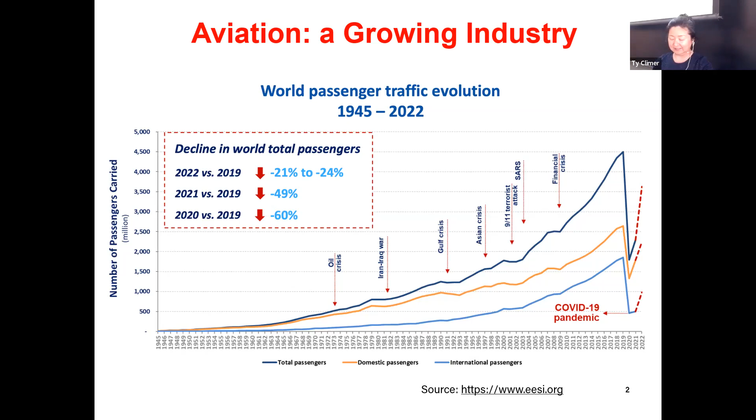Now next, I want to talk about exactly what the emissions from aviation are. Currently we talk a lot about carbon dioxide because that's the global warming, the climate crisis we're dealing with. But carbon dioxide is not the only one. There are also nitrous gases, water vapor, and soot, sulfate, particulates. So these are all kinds of emissions from the exhaust of aircraft engines.

Now, this is a study really focused on the effect of these chemical species on climate. They can either warm or cool the climate, either directly or indirectly. So the bottom bar, this colorful bar, basically tells us each of these species' contribution to global warming relative to CO2. CO2 is 1, because that's the reference.

Nitrous gases and also ozone—and methane actually is blue, that means methane cools the atmosphere. Sulfate also cools. So this is to give you an idea that carbon dioxide is not the only pollutant. There are others—for example, nitrous gases, NOx, ozone—those are the things really important that we have to deal with.

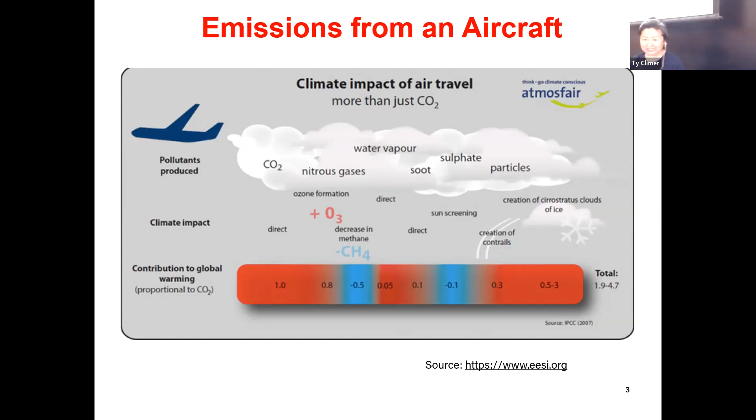Now next, I want to show you global CO2 emissions from aviation. Again, this is consistent with the number of passengers aircraft carry that I showed you in the very beginning—it's going up. The red line is the total CO2 emission in 2018, which is about 1 billion tons. Now, aviation is about 3% of the total carbon dioxide emission. Again, it's going to be increasing, maybe to 5% in 10 years and even more.

So this is something that we cannot ignore. We have to address that if we want to achieve a net zero carbon future.

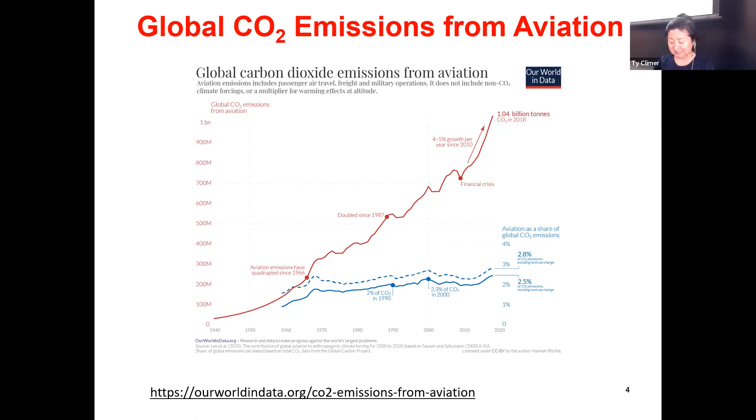All right, next let's start our journey to sustainable aviation. I'm going to share with you my understanding of the technologies in the future and what needs to be done to achieve sustainable aviation.

Now, the first question is, aviation perhaps is the hardest transport sector to decarbonize, right? I read a report by the National Academy of Engineering. Basically, what it says is, in order to achieve zero carbon emissions by 2050, nearly everything needs to be electrified, and the electricity comes from alternative renewable sources like solar, tidal, right? Everything needs to be electrified. I think that's fine, right?

Think about the devices or anything you use in life. What cannot be electrified? I'm still using a natural gas heater and natural gas stove in my home, but come on, they can be replaced by electricity. So basically everything can be electrified, but there are two industries going to be very hard to electrify. The first one is aviation, which we're going to discuss today, especially for long-range intercontinental airplanes. Now, the other one perhaps is ocean shipping.

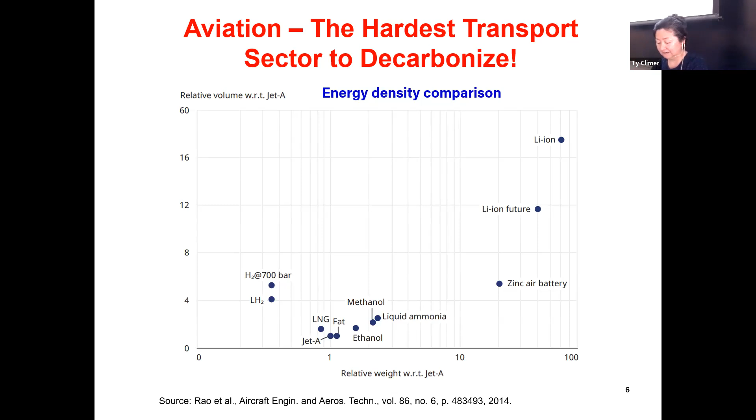All right, so aviation — that's a challenge. We always say, when we don't say difficulties, we always say challenges, because challenges indicate opportunities. So I'm going to talk about the research and development opportunities in the aviation industry to achieve zero emission in the future.

This slide gives an idea about the decarbonization pathway in the past and also current efforts. Our aero students are probably familiar with these concepts. Really the industry is focusing on improved efficiency, right? If I can improve the engine efficiency by 10%, that means I'm going to burn 10% less Jet A. I'm going to emit 10% less carbon dioxide, right? I listed a couple of the technologies or approaches.

They're not a complete list, but just to give you some flavor about what the aviation, the aerospace industry is doing nowadays. For example, increased bypass ratio turbofan, right? Those who have taken 438 air-breathing propulsion know the importance of bypass ratio on the overall efficiency. So that's the trend: higher bypass ratio, higher cycle efficiency, and lower fuel consumption.

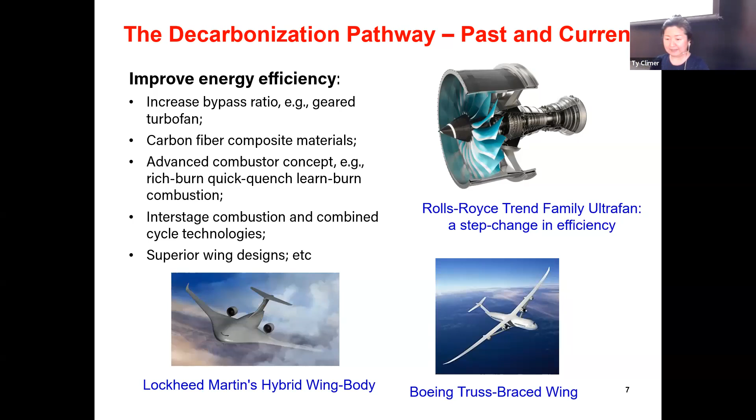But keep in mind, if these aircraft engines still burn Jet A, no matter how much efficiency you can improve - 10, 20%, that would be a breakthrough - this is not enough, okay? So what is the future? If we really truly want to achieve net zero emissions by 2050 or 2100...

This is the path, what I'm showing you here. This is from IEEE Electrification Magazine. I want to mention that there are mixed views about the future - if you look at leading experts, even they disagree with each other.

I think this is a complex situation. It depends - maybe each country will have a different approach, depending on what kind of natural resources the country has, the geopolitical considerations, a lot of factors. But me personally, I believe this is the future.

Okay, if you look at this graph, before the 1940s, think about the airplanes before World War I and II - those propeller airplanes driven by an internal combustion engine burning gasoline. So this is gasoline - those are early aircraft engines. They were slow, but they were significant in terms of their importance to the aviation industry's progress.

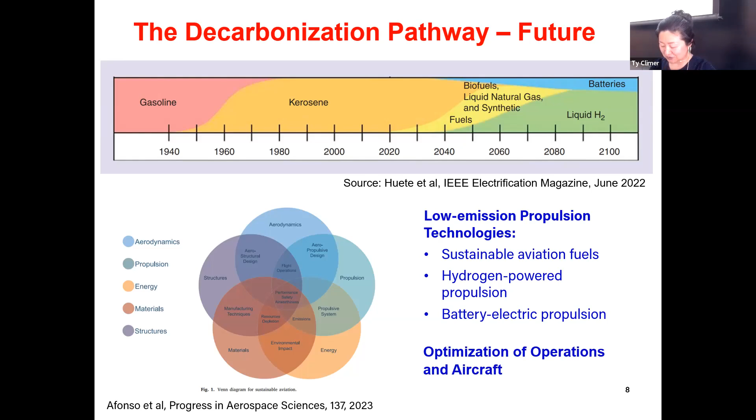Now, the first one we're going to look at is sustainable aviation fuel. So what is sustainable aviation fuel? These are liquid hydrocarbon fuels similar to Jet A, but not exactly the same. We know Jet A is a mixture of about 300 different species, so it's not a pure chemical species, it's mixed.

Sustainable aviation fuels are derived from a variety of feedstocks, including agriculture and forest waste, municipal solid waste, or even non-food crops. We use thermal and chemical methods to convert them to liquid fuels. But again, they are liquid hydrocarbon fuels, and because the properties are similar to Jet A, there's no need to change the infrastructure.

The fuel supply, the airport, and even the aircraft itself - that's a short path to solve the problem. In fact, it is the transition step. So I listed a couple of examples of production of sustainable aviation fuels. The first one is called gas, this is the gasification process, Fischer-Tropsch. The feedstocks are cellulosic biomass like wood, agricultural waste, even municipal solid waste. This liquid fuel can blend with Jet A by a maximum of 50%. This is gasification, a high pressurized heating process.

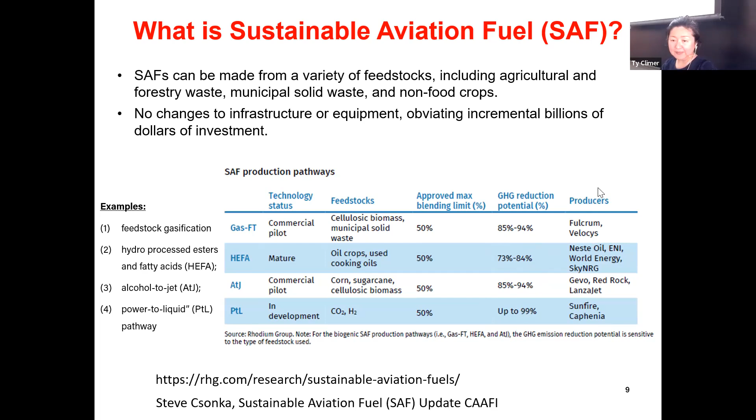To give you an idea, this is an example biorefinery to generate sustainable aviation fuels. Basically, we have two ways to do that. The first is the biochemical route, using microorganisms like bacteria or yeast to convert biomass into liquid fuel. The other is thermochemical, using heat - using a gasifier, for example, with heat and often pressurization, because pressurizing helps the conversion efficiency to convert biomass into a gas or later into liquid fuel.

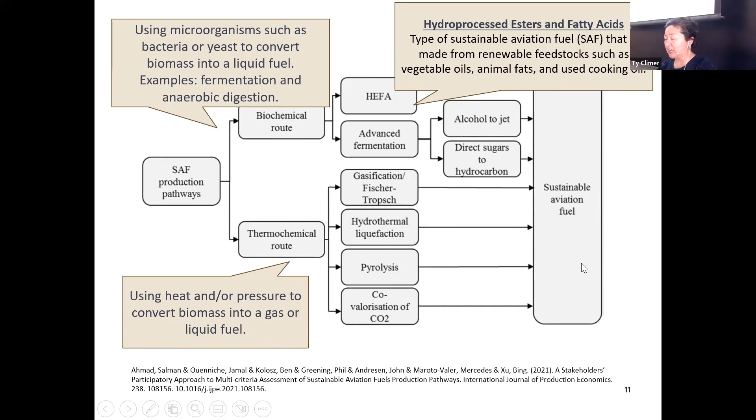I would talk about hydroprocessed esters and fatty acids. Again, they can be made from renewable feedstock: vegetable oils, animal fats, and even cooking oils. So these are the different processes to generate liquid sustainable aviation fuel.

So what are the challenges and opportunities with sustainable aviation fuel? On the bottom, you see the Biden administration's Sustainable Aviation Fuel Grand Challenge. The goal is to scale up production: 3 billion gallons of sustainable aviation fuel by 2030, and 35 billion by 2050. Currently it's 4.5 million gallons per year. So as I said, by 2050 this is a transition to the eventual zero carbon emission.

Sustainable aviation fuel plays a very important role. Now, what are the challenges? Feedstock availability and cost, and production capacity, infrastructure, refinery, storage tanks, transportation systems.

There are some pilot plants, smaller scale and on subsidized grants from government, but they're not scaling up yet. There's also regulatory and certification requirements.

In terms of compatibility with existing aircraft, whatever process generates a liquid hydrocarbon fuel, you cannot just throw that into an aircraft engine. It may cause problems with physical properties, chemical properties, like boiling point or viscosity. They need to fit into the current range that works for an aircraft.

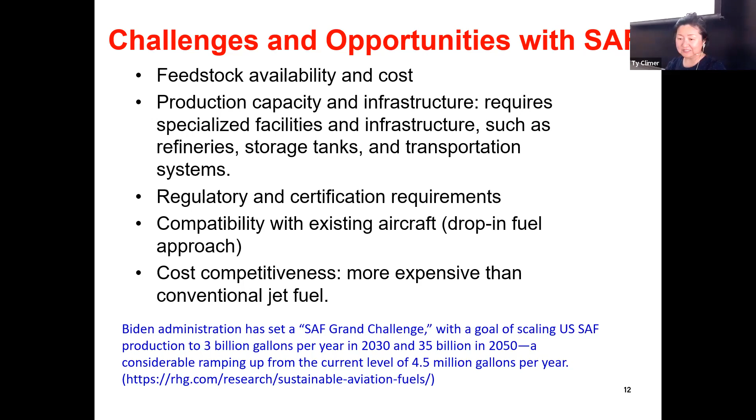All right, so that's about sustainable aviation fuels. I'm going to move on to hydrogen now. When I talk about hydrogen, I subconsciously feel very excited because it's a magic fuel. As someone whose expertise is in combustion science and propulsion, hydrogen is a beautiful fuel to us.

From the mass or weight perspective, hydrogen has advantages. For the same weight - 1 kilogram hydrogen versus 1 kilogram Jet A - hydrogen has almost 4 times the energy of Jet A. Lastly, hydrogen can be used in combustion engines or fuel cells, both with high efficiency. It depends on which one - there's competition between combustion engines and fuel cells, both utilizing hydrogen. We'll see the applications.

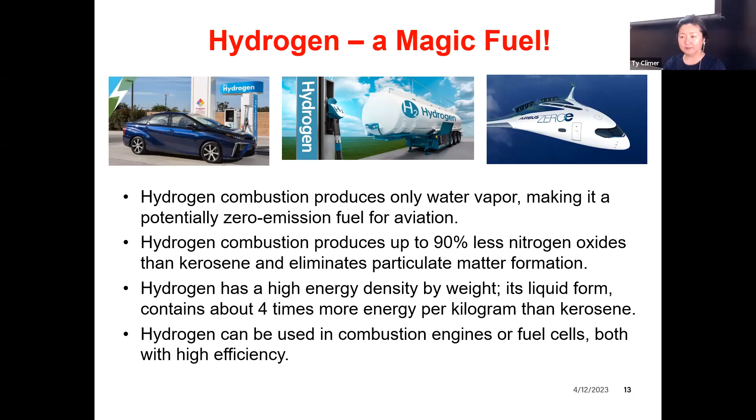Now I can talk a lot about hydrogen combustion, but I want to point out a few things, especially for those who are not engineering students. Hydrogen is a very, very unique fuel - it's very light, its molecular weight is like 2. But light fuel means what? High diffusivity. High diffusion is a very important process in all chemical propulsion devices.

Fuel and air need to meet each other to burn, like they need to get in touch with each other on the molecular level in order to have a chemical reaction. So if hydrogen is highly penetrating, highly diffusive, the reaction is very fast. If you look at hydrogen flame propagation versus Jet fuel, hydrogen is 5 to 10 times faster.

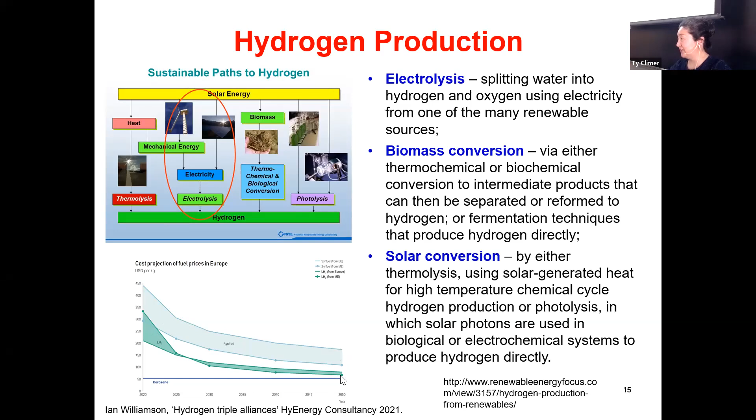Now, hydrogen-powered aircraft engines are not just in the future - that's happening right now. If you search news for hydrogen aircraft turbofan, you'll see nearly every major engine manufacturer like GE, General Electric, Rolls-Royce, CFM International, Honeywell, all investing in hydrogen-powered turbofan engines. So this is an example.

This was, I believe, just a couple months ago in the news - November 28th, 2022. Rolls-Royce announced with their partner EasyJet that they successfully tested a hydrogen jet engine on the ground. This is an AE2100A regional aircraft engine, a turbofan engine powered by hydrogen. So as I said, all the major engine manufacturers are testing hydrogen-powered turbofans.

Now another very exciting sector is smaller aircraft. For example, you see this news: hydrogen-powered aviation reaches milestone with ZeroAvia's flight. This is a small startup company, and this is a 19-seat hydrogen electric prototype airplane, which flew maybe 10 to 20 minutes, which the company claimed is a historic event, which probably was.

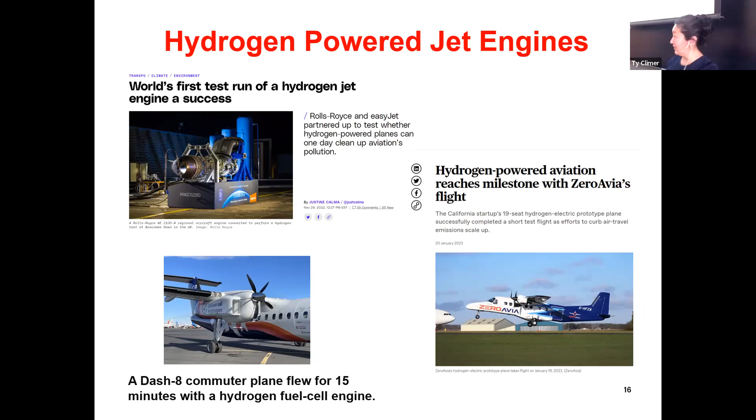So what are the challenges and opportunities for hydrogen? I'll list a couple, but I think the biggest challenge is low energy density by volume. Perhaps for smaller aircraft over short distances, like 100 to 200 miles, commuter aircraft, hydrogen compressed to 800 bar - sorry, that's not PSI, that's too low, it should be bar - 800 bar probably can do the job. But larger aircraft, from the energy comparison I showed you earlier, must use liquefied hydrogen.

To liquefy hydrogen, it needs to be stored at negative 253 Celsius - that's what we call a cryogenic propellant or fuel. There are other ways to store hydrogen through advanced materials, but cryogenic is one of the ways. So the tanks need to be extremely well insulated, and also need venting, just like rockets. You sometimes see when the space shuttle launches, that white smoke - that's because the cryogenic liquid hydrogen and cryogenic liquid oxygen need to be vented to prevent the tank from exploding. So I think liquid hydrogen storage is the biggest barrier for deploying hydrogen technology in aircraft.

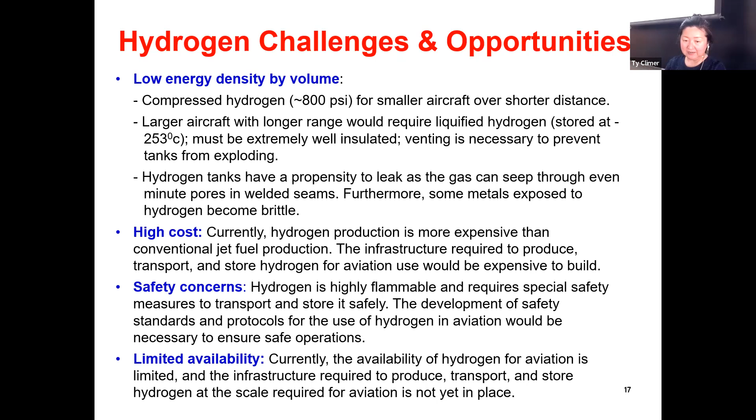Okay, I have about 20 minutes, so I'm going to talk about electrified aircraft propulsion. This is the third era, and in 100 years electrified aircraft will take a significant portion of the whole industry. What are the advantages of electrified aircraft?

Obviously that's the environmental impact, net zero. Now, the most exciting business sector of aviation that is going to use electrified propulsion is advanced air mobility. You've probably heard about that - those are the 2-seat or 4-seat passenger vertical takeoff and landing aircraft that will transport you from here to Indianapolis or Chicago. It provides an affordable, efficient way for urban transportation.

In the aerospace industry, if you ask our students what the most exciting fields are, they'll tell you one is rockets - they want to work for SpaceX or Blue Origin. The other sector is advanced air mobility. You're going to see a lot of startups and billionaires, maybe from Purdue, in that sector. Lastly, it enables small short-range aircraft with a high level of autonomous operation - that's completely going to be happening in the next few decades.

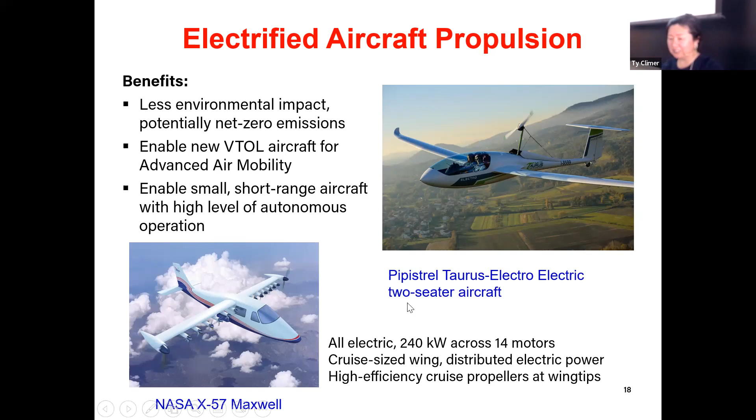Now on the right-hand side, you see this picture - this is the Pipistrel Taurus Electro, a 2-seat all-electric aircraft. This is on sale - if you have enough money, you can buy one today. The range for these two is typically 50 to 100 miles.

There are 3 types of electrified aircraft. The first is all-turboelectric or partially turboelectric, where you still have the traditional turboshaft or turbofan engine burning Jet A, but it drives a generator - that's the power source. The electric battery then drives motors to generate propulsion through propellers. Partially turboelectric splits thrust between distributed propellers and the fan. Then there's hybrid, which means a turbo engine driven generator for electricity plus battery. A lot of work is going into determining the ratio between the two - how much battery versus how much from the turbo.

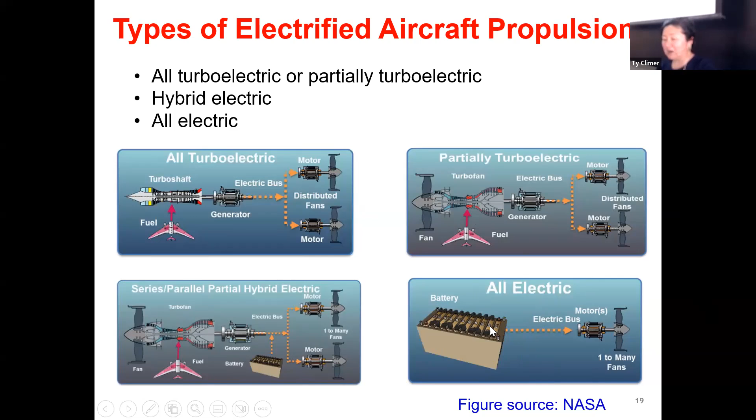And the last one is all-electric, so all the energy power source comes from the battery. Now, again, we're going back to energy density because that's really key for anything flying in the sky.

This shows battery specific energy required for all-electric urban mobility aircraft - these are the small aircraft for advanced urban mobility. You can see battery specific energy in terms of watt-hours per kilogram, and range in miles. So 150 watt-hours per kilogram for 2 to 3 passengers over 50 miles is completely achievable by battery today.

Now on this side, it's a little more challenging, but still a solvable problem - requiring 300 to 400 watt-hours per kilogram for 2 to 4 passengers over a 120 mile range. These should all be achievable with electrification given advances in battery technology, even though current state-of-art lithium ion battery is only 170 watt-hours per kilogram.

So again, you see from here, this is Tesla model, this is the energy density, about 130, something like that. And this is Nissan, and there are other types of battery technologies, but all of them, it's going to be very hard to exceed 500 watts hour per kilogram.

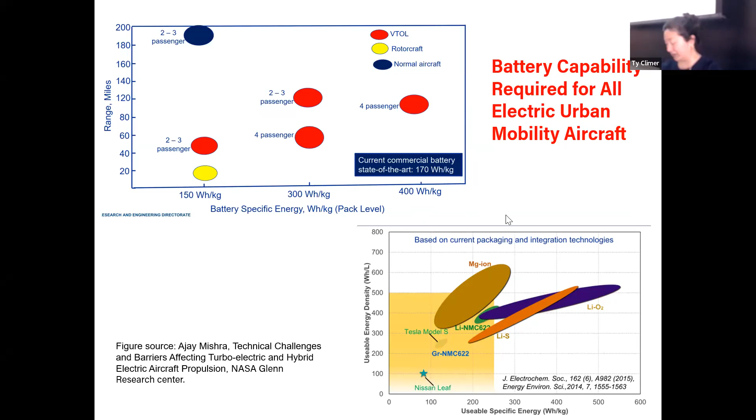Okay, so the question is, will battery eventually advance to the point that we can do electrified aircraft for medium long range? There's a study that I cited over here. Basically for regional aircraft, the specific energy required is about 600 watts hour per kilogram. And then for these narrow body, larger aircraft, it's about 800. And then for these wide body, intercontinental aircraft, it's 13 to 1400 watts hour per kilogram. So, in fact, battery technology may be advanced to 500, but still below all from regional to narrow body to wide body aircraft. So this is a challenging problem over here.

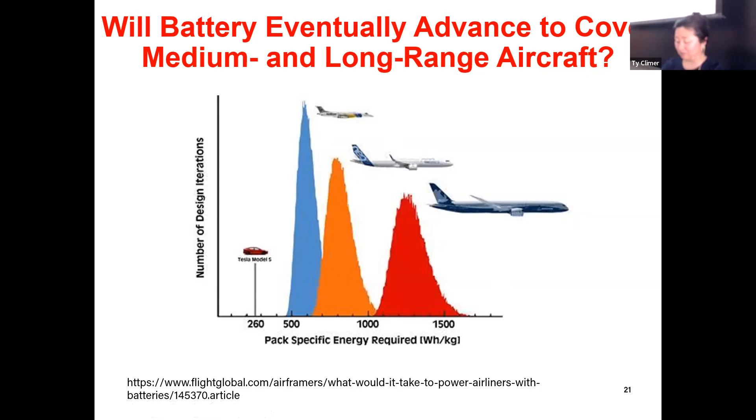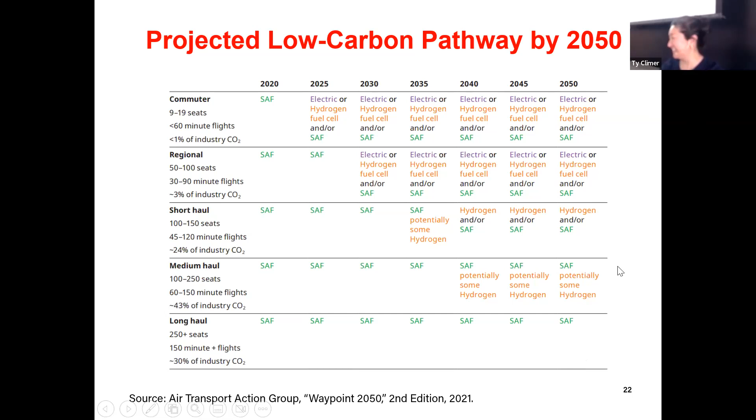So this table gives you a better idea that for commuter, regional aircraft, electric or hydrogen fuel cell would be good choice. But for short haul, medium haul, hydrogen or synthetic sustainable aviation fuel, and long haul, it must have the energy density similar to JET, liquid hydrocarbon fuel. Okay, so this is by 2050. Now, if you want to extend that to 2100, this column, you're going to have more and more orange color, which is hydrogen, again, because of the energy density.

So this is my last slide. What are the opportunities and challenges for electrified aircraft propulsion? I have to say, this is a very exciting field. Whenever people talk about sustainable aviation, electrified aircraft, that's the first word that comes to their mind, right? So this is especially in the emerging market of advanced air mobility and commuter applications. So for smaller aircraft, definitely electrified aircraft is already taking place. Regional short haul, maybe a mix of electric and hydrogen fuel cell, but medium and long haul likely rely on hydrogen and sustainable aviation fuels. Now, this sector highly depends on battery technology advancement, packaging, chemistry, and so on.

But one thing I want to point out is that most battery research so far have been for what? For ground applications like electric cars, right? Very few batteries are designed for aircraft. Think about aircraft, you can fly up at 10,000 feet or even higher. It's cold there, okay? These electrochemistry highly depend on temperature, okay? And also the electric circuit. So basically, I think that even for advanced air mobility and regional short haul, these smaller aircraft, battery research is just starting because they will be very different from ground applications.

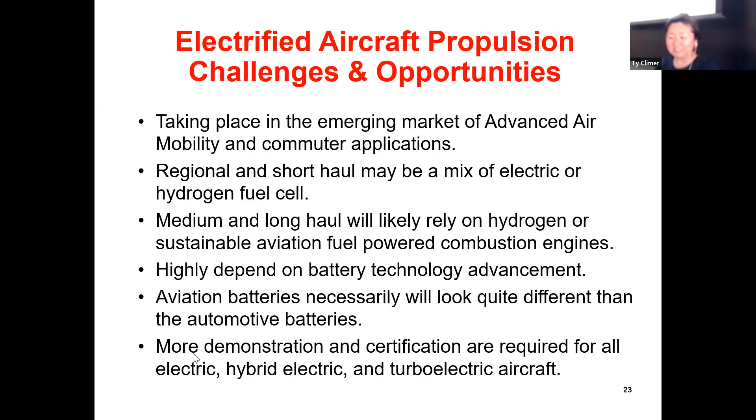Lastly, I think FAA and NASA working together, we need more demonstrations, more certifications to sort of promote the growth of electrified aircraft market. Okay, I think that's my last slide. I'll stop over here. We do have a bit time, and I'm happy to answer your question.

Yes. So there's sort of some talk about like past the point of no return as far as carbon emission goes. Like it's just planned to like 2050. Is that well within the point of no return, as far as, like, we can stop the changes that we're causing?

Yeah, I think some scientists believe we have passed, unfortunately, we have passed that. I don't know about it, I cannot give you, but there's a famous saying, the best time to plant a tree is 10 years ago, or now. So I think that all these, what I've talked about needs to be happening quickly.

So do you think 2050 is soon enough, or is that the most reasonable timeframe that we can achieve? I think for aviation, 2050 is a reasonable one because it's the hardest sector to come on. But the others, like electrical cars, that can happen more quickly than it is now, right? Tesla cars, and hydrogen fuel cell cars by Toyota, Honda, they're running on roads.

Yeah, it's just like, you need to give a little bit of economic return or incentive to get those, but also you need to create the infrastructures for green renewable electricity and green hydrogen. So those transportation sectors can happen more quickly. But aviation is more difficult. The main reason is the energy density that have been emphasized.

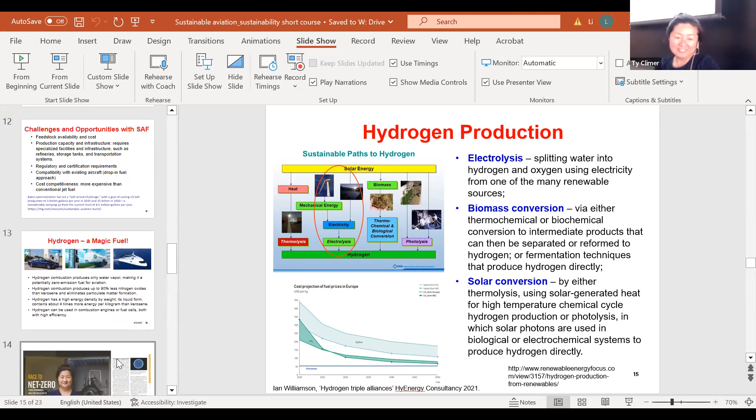On the hydrogen slide, there was something about production of nitrogen oxides with hydrogen fuels. I was wondering, how does hydrogen combustion produce any sort of nitrogen oxides? That's because the nitrogen atom in nitrogen oxide comes from the entering air, that's the chemistry.